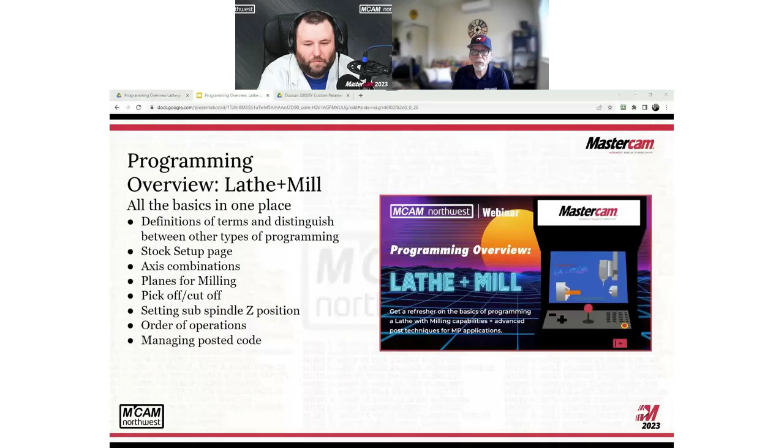So I guess we'll just move on into it here. Before we get started, it's good to have a good understanding of Mastercam lathe and the mill product. Obviously, when you put these two together, it would be a little more challenging if you just knew Mastercam lathe, hadn't worked in mill, and then you couple those licenses, and then you're not familiar with the milling tool path.

So try to get a good understanding of both sides of Mastercam first, and then also experience in the current version. For example, if you have a lathe license and you're using 2023, but you haven't touched mill since 2019, that could be a little bit of a challenge also.

So it's good to kind of get your basic learning out of the way first for the fundamentals of those two licenses, and then working in the same version.

When you first start off with this, getting a good understanding of your CNC machine first - we do see customers that sometimes get the cart before the horse. They're anxious to get programming, but they're not so familiar necessarily with the machine itself. So getting through your training on your machine and getting a good understanding of the code and everything for the machine, so you know what to expect from the output.

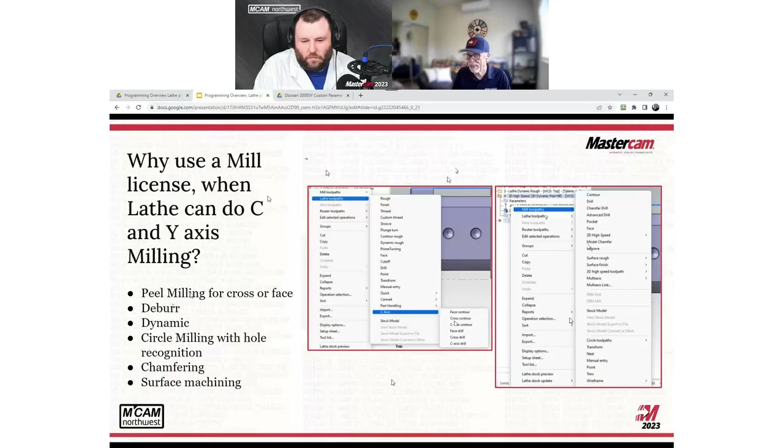Just for some clarification here, Ryan, there was some garbled transmission. He was wondering if he was misunderstanding, does the machine simulation work in the mill turn environment or only the mill side? So I had misspoken.

Machine simulation inside Mastercam, what we call MachSim, would be mill machines only, but the mill turn environment, sometimes called a dot machine, has its own full simulator for the lathe environment itself. That's a product that lives within something like Code Expert, and that's different from MP style posts. You may sometimes hear mill turn simulations called MP.net, and that's that side of the post, so it's a different post language, MP.net versus MP. We typically delineate that as mill turn lathe environment, and that is the full simulation for lathes. But that is a separate add-on, and it does require a lathe and a mill license in order to get that for your lathes at a minimum.

To elaborate on that a little bit, the thing to understand is that when you buy a machine environment or a dot machine, it is the post processor and the simulator all coupled into one package. So it's very specific to that machine, it has the skins or the machine assembly for that particular machine, make, model. In fact, in many cases it's customized right down to that particular serial number of machine. They're much more expensive, but the benefit is obviously in collision checking and the ability to fully simulate all your locators and the full turret assembly against the chuck jaws and everything, checking for collision.

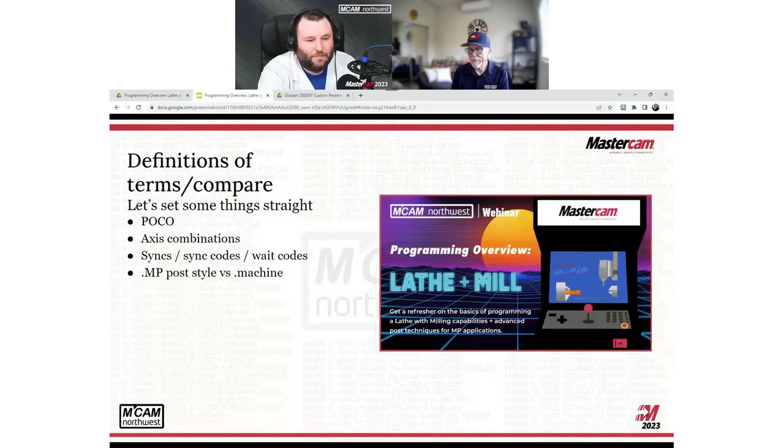So a little bit on the difference between the two styles. Heads up, this little animation will show you.

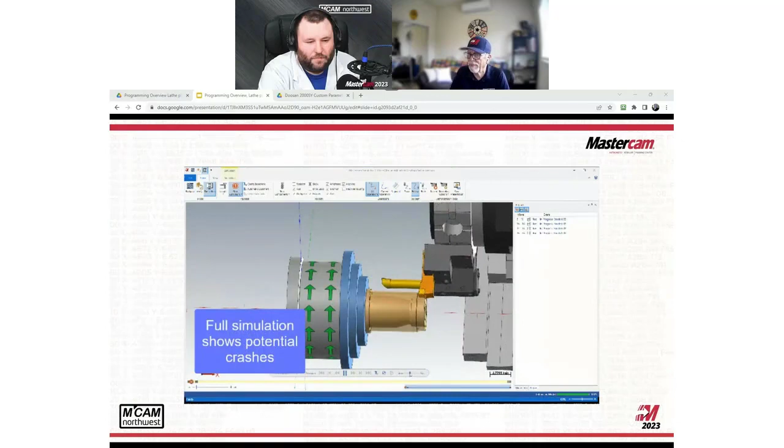If you look initially here, you'll see this is what you're going to see in your verify just using an MP post with mill and lathe. And then when you get into dot machine, this is what you're seeing for that same machine and the same program. You get the ability to understand collision potential like this, and then to quickly go in and correct that.

So you're kind of flying blind a little bit with just verify. You can elaborate more on the tool mounting or tool holder for live tooling and get a bit more accurate display on the stick out of the tool and collision check a little bit, but it's nothing like seeing the full 3D assembly of the machine in there.

So same licensing as far as Mastercam goes for the toolpath generation, but it's an additional license when you buy the dot machine environment, which comes with the post and the simulator, and that is a licensed product.

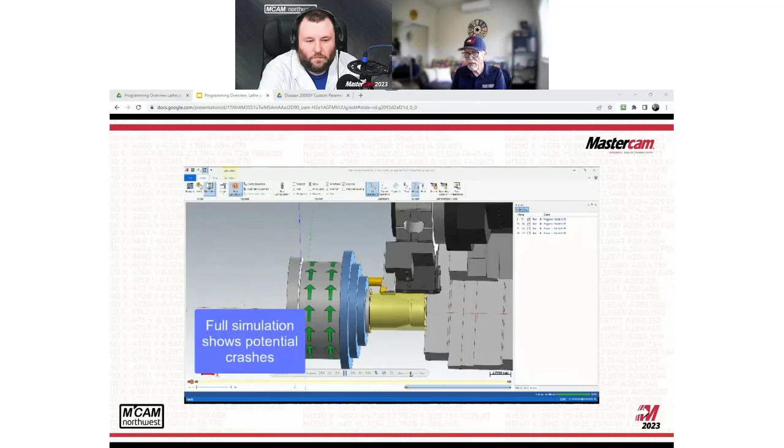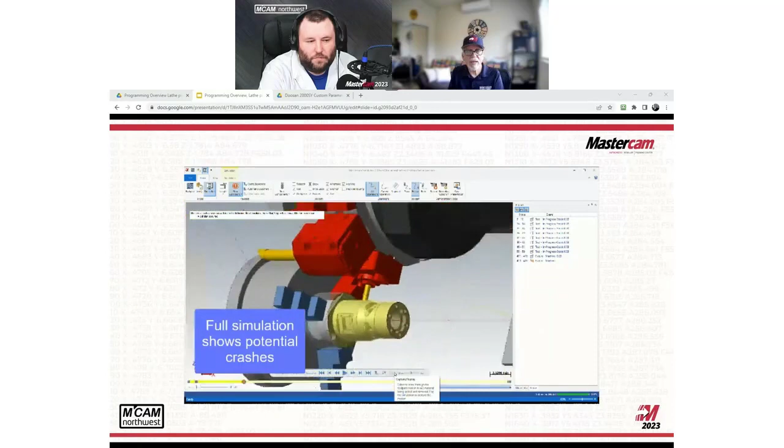So you don't need the mill turn license unless you're doing more than one code stream. If your machine has two code streams, then you need the mill turn license as well.

There is a presentation on our website that goes into more detail about lathe versus mill turn. So, Jeff, I don't know if you want to try to hunt that down.

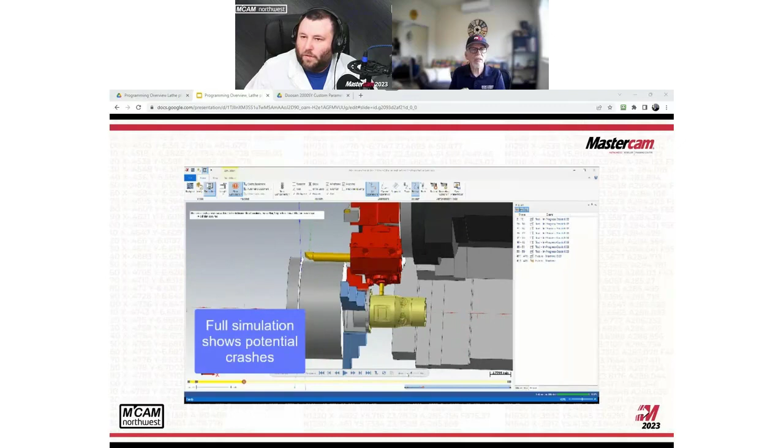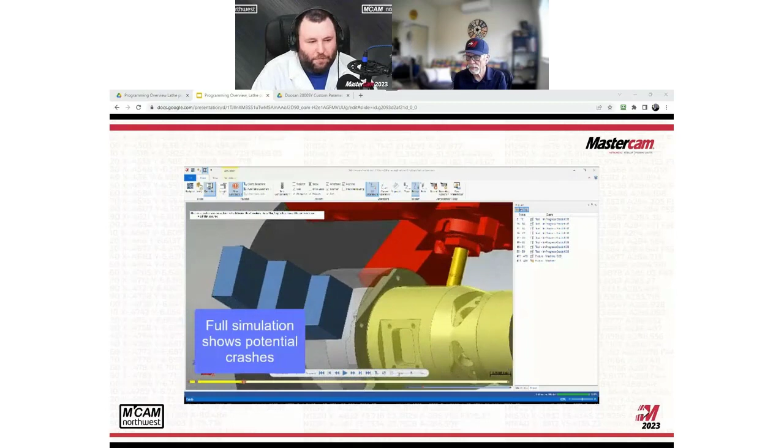John said it's in the MCAM videos. Yeah, and to make mention of that, because it's a pretty lengthy presentation, in case anybody wants that, we're not able to link the videos specifically themselves from that page, but in chat is our videos page, mcamnw.com/videos. The first presentation in there is building blocks for mill turn. You're also able to scroll down and see other presentations we may have for it, but I believe that's the one, the building blocks for mill turn that we have there. I think that's it, yes. There may be a way to link that directly, but unfortunately I haven't figured out how to link Demio or Vimeo videos. Here, I think I've got it. There's not that many videos on there. Here, so, I got it. Okay good, you just have to try sometimes.

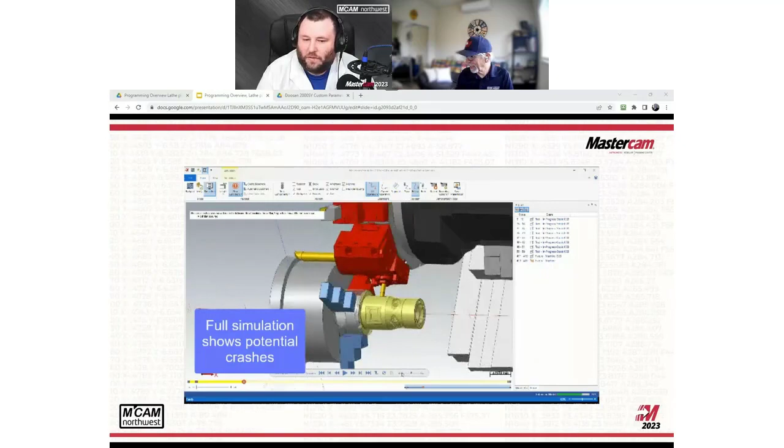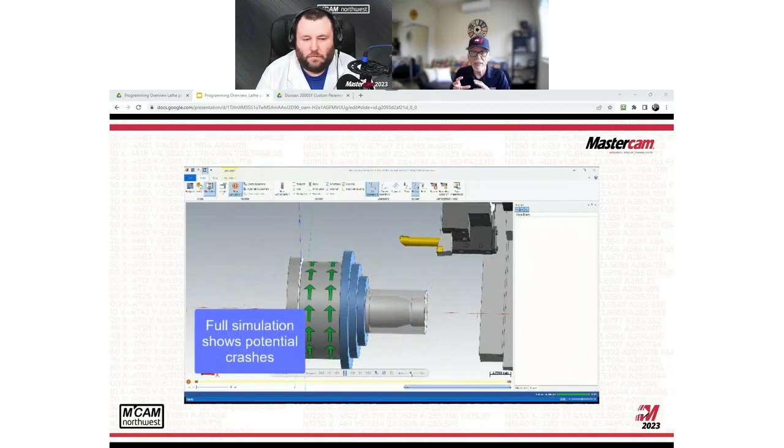So that gives you a good animation to kind of see, if you're doing really basic live tool operations, cross or face, this is going to be fine. It's just when things are tighter, you're more uncertain as to what clearances are. Maybe you have a smaller mill turn, working in very close to the chuck, or maybe even a collet system, and you're working very close to the spindle, then it gets pretty iffy, right?

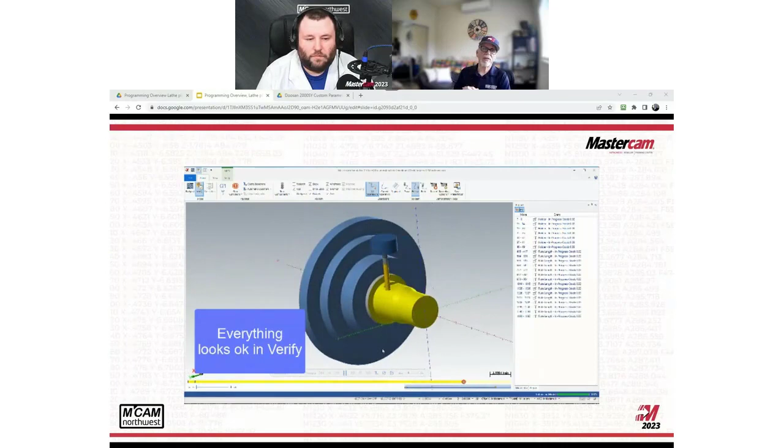Because you have your adjacent tools and those locators, that could also interfere with the chuck jaws. So if that's the scenario and you're doing that on a regular basis, then maybe there's a return on investment for jumping into a dot machine for that particular style of machine.

An anecdote for me: I used to program on just normal MP posts where all you had was verify, and I would find all the times I'd run out to my machine and realize I had a tool in a station that was too close, and all of a sudden needed to move it to the back side of the turret or something like that. It facilitated running back into the programming room and changing that up.

So making adjustments and having that simulation and being able to run it at the computer itself really highlights those collision issues before you're out there loading tools into the machine. Great visual check for that. Of course, full collision checking, which is the big important one.

Dot machines are my personal favorite. You can still program in the normal MP posts, you just have to be a little bit more cognizant of where your tools are at on the turret.

Right, so it really took the development of the dot machine environment to be able to feed it enough information through the post processor and then off into simulation. That's why that's all packaged together to get that accurate display. So yeah, it's a whole different world once you get into that environment.

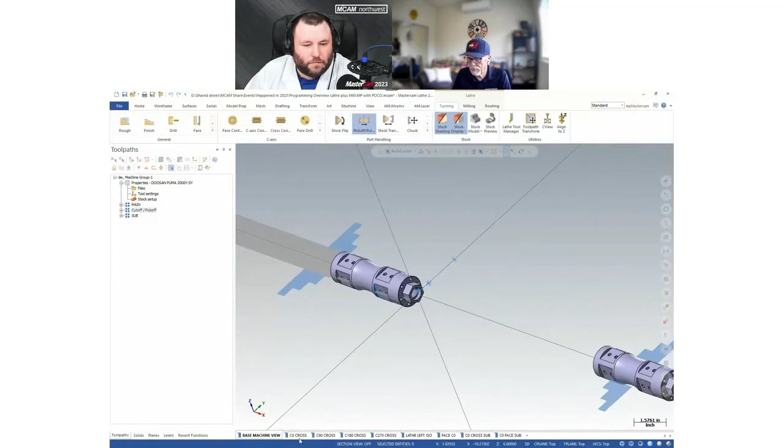Okay, so moving on, we're going to talk about the stock setup page, so I'm going to jump into that. I've got an example that's programmed up here, and I have some view sheets that are set here, we're going to talk about that.

And so the structure for this is all done with an MP post, and I have my POCO ops and subspindle ops, and then my main spindle operations. And then in the setup for this, in stock setup, I have my left spindle stock defined just as you would for lathe. I have my left chuck jaws defined just as you would for standard lathe programming.

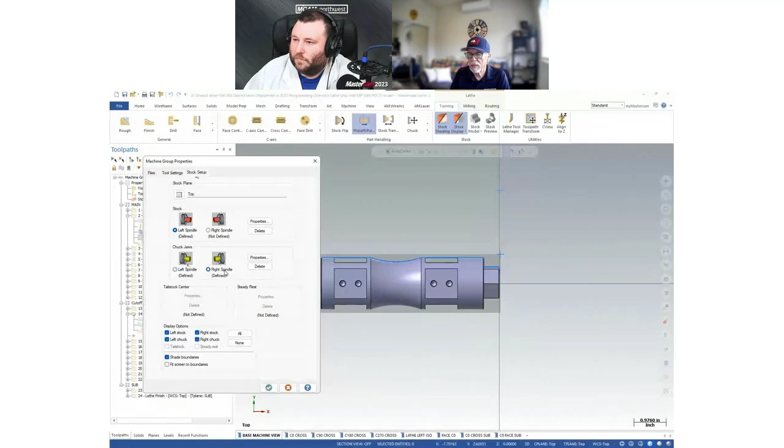But then you'll also notice I have a right spindle defined here, and when I go to properties for this, I have a distance set in here, which is the distance for where that chuck location is at. Now I'm just using an arbitrary value of 15 inches. Of course, that would be a very, very small lathe, but this is just really visual.

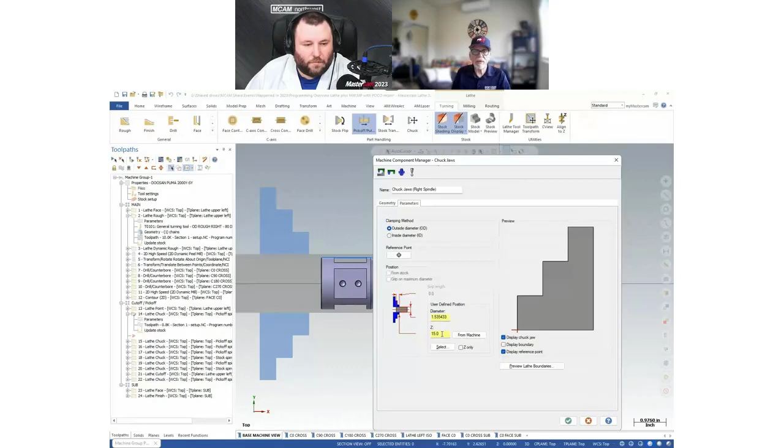So on screen in Mastercam, when you're not running a machine environment, it's just sort of a symbolic distance between the main and the sub spindle. You want that number to be pretty realistic for whatever machine you're programming, and so you do need to set that distance there.

Once you set that distance, then when you go to do your POCO, you're going to see things transfer from your main spindle to the sub spindle. And right now I have kind of everything turned on for the visual, and so that's kind of the first step.

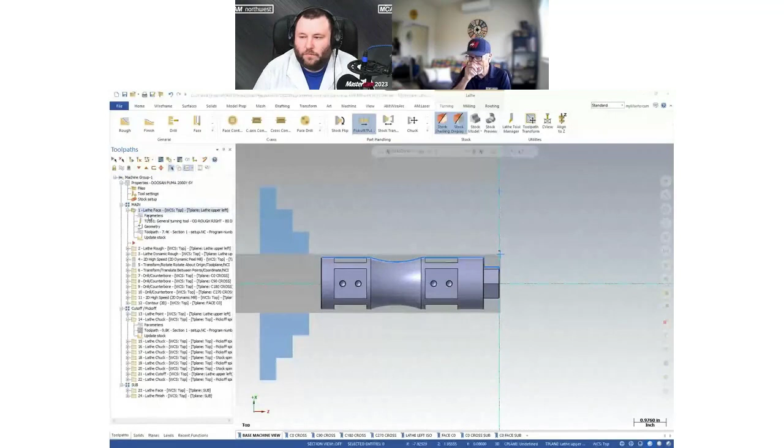And then when you get into your turning operations, when I go into any main spindle operation and I go to parameters, what's really a good habit here is, when you start working with two spindles, make sure the first thing you look at is this lower left corner, and that you have the right axis combination selected. It's very easy because it'll default to this.

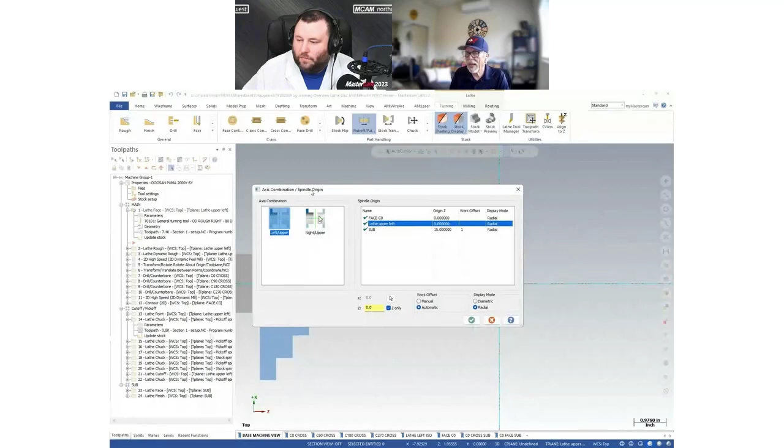When you go into your axis combinations, when you're starting with a new file, you're going to have left upper, and then your post processor will put the right upper axis combination here, but nothing will really be set for this in a new file. So what's required is that you select right upper and then you create a new tool plane. When you create a new tool plane here, you'll see that it says lathe upper right. Then what you want to do when you create that is set your work offset to 1, and what that's going to do is set up a G55.

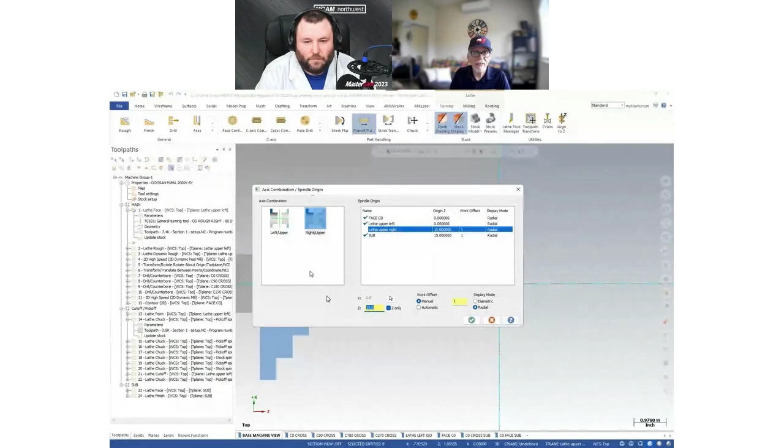And then you're going to put your symbolic distance to where G55 is at here. So I've got a work offset of 1, which will trigger a G55 whenever I call up and use lathe upper right. In my example, I did this earlier and I just renamed that to sub. So I know that when I look at the axis combinations, I just look for sub, and that's automatically going to give me the spacing and the work offset.

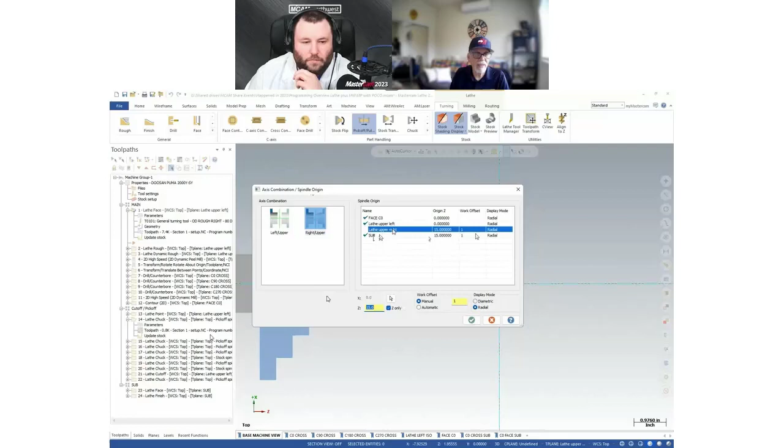This is something you have to do when you start a new session in Mastercam. So I'm going to cancel out of this. You'll see all of my main spindle ops are all set to left upper, which is just the default. You don't have to set that, it's already set for you.

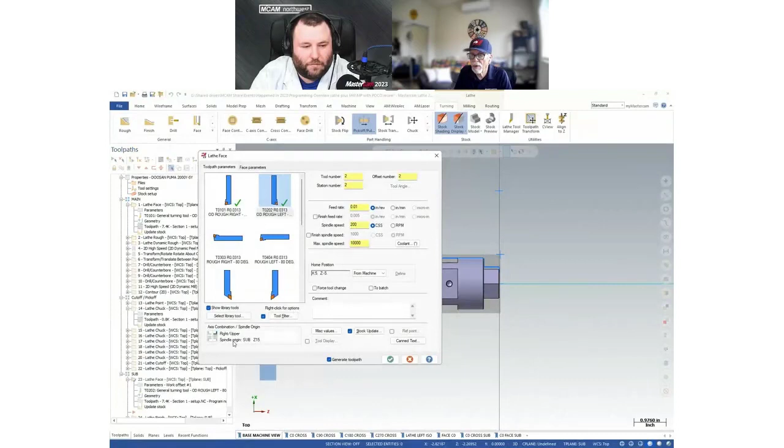You'll see that after my POCO ops down here in these sub ops, if you were to open one of these up, you're going to see that I have my axis combo set to right upper. And that has this spindle origin all set with the work offset of 1, which is G55. And that's how we're getting the two.

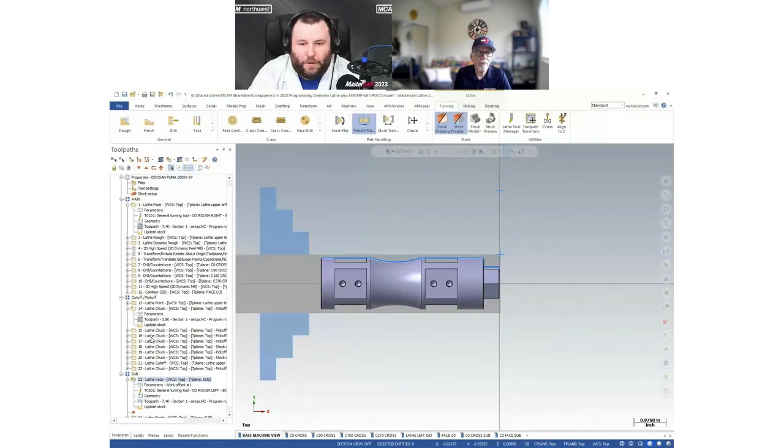Just to talk about that, sometimes I find with individuals, they'll go to work on the sub spindle, and when they start their work, because their tools default to that upper left axis combination, they're not able to get their lathe tool paths to look correct on the sub. So that's where it's always good to check that axis combination first when you're building your new lathe operations on the sub, just to make sure that you're picking the correct axis combination. Mastercam doesn't know what side you're going to be working on, so that's something you need to keep in mind for subs.

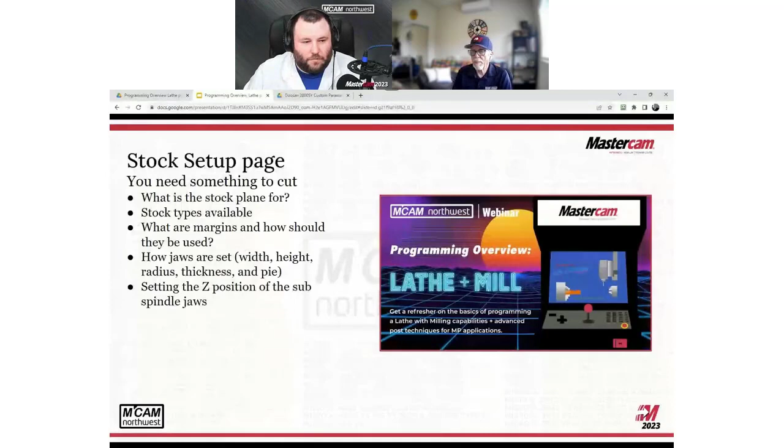All right, so that's a little bit on axis combos. I did have a note here to talk about margins in stock, but I'm thinking most are familiar with that, but let's just touch on it real quick just to make sure that when you're in your stock setup and properties...

In my example here, I am using just the standard kind of stock definition, make from 2 points, keyed in the exact OD of the stock that I want to order. And then the length is the actual length of the part. And the position along Z-axis is just set to Z0.

And then I'm using a right margin to give me my 30 thousandths of cleanup for my face operation. You can simply shift the Z position of the stock 30 thousandths and not use that right margin. I've seen that done both ways.

So Jeff, what are your thoughts on that? Do you typically use the margin, or do you? No, I'm naughty, I've always had the margins off, and I've repositioned my Z the 30 thousandths, but both are effectively the same. The difference would be, I believe, the margin bakes in for the length of part that you put in. You could leave that the same, and then when you add the margin in, it maths that out for you. Versus if you push your Z face out, you then physically need to account that in for your part length as well.

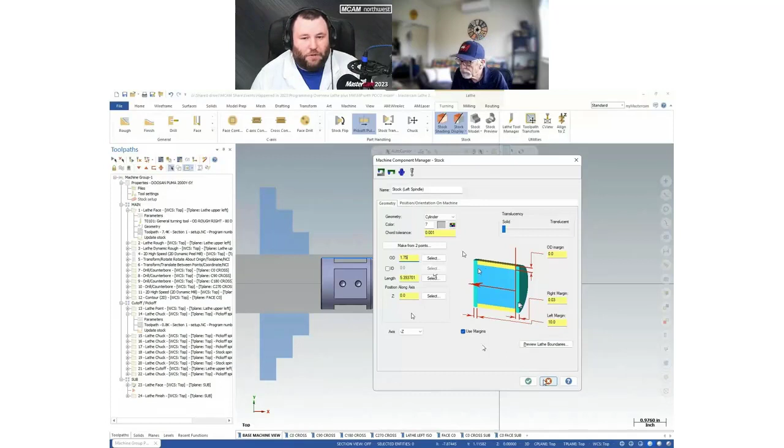Along those lines, if you didn't have the bar being long enough, you will get an error like 'left chuck, no stock to clamp.' That's what's going on - it's missing it because the system is looking at the boundary of the stock representation when it grabs. If that doesn't exist, if it's been pulled out too far, you'll get an error.

So I had a note to talk a bit about jaws, but I think we have really good videos on the jaw setup itself. Let's just see if anybody has a question, or if you want to spend some time talking about jaw setup. We can let people pipe in there in the chat. Otherwise, we'll skip past that. No questions so far - okay, I was kind of guessing that might be the case.

Okay, so we went through axis combinations fairly thoroughly there. Maybe show where in mill operations we would access the axis combinations, because it's in a different location.

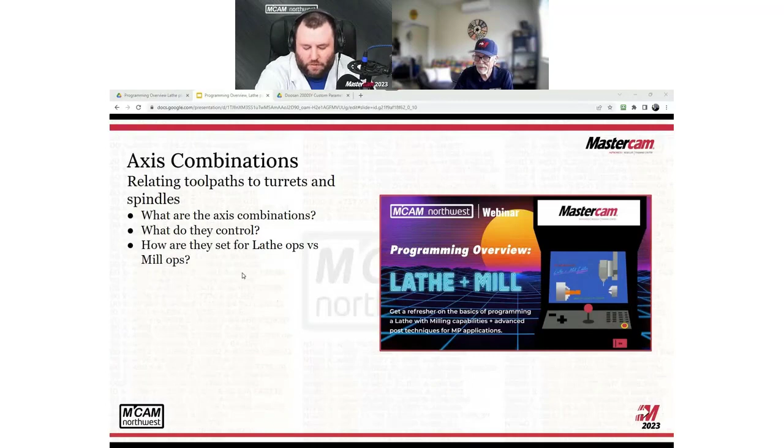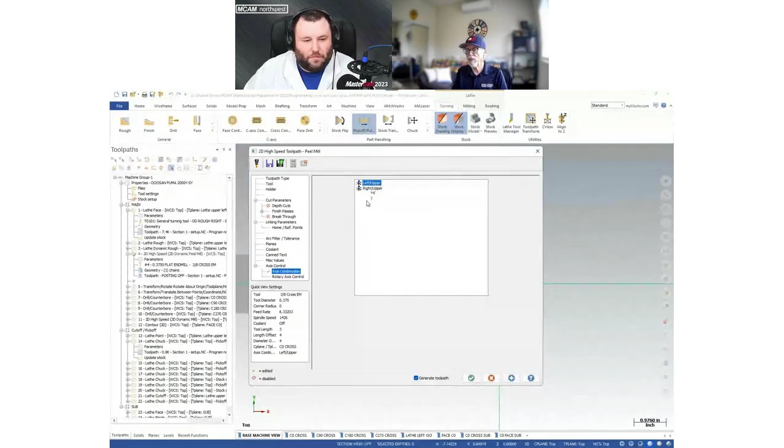Yeah, I think this is a good time to talk about that. So when you're into a milling operation, let's start with my first mill operation here. It's going to default to left upper, but you'll see that in milling ops, it's down here under axis control - axis combination, left upper or right upper. So this is just simply a selector here. You need to make sure that when you start doing milling operations for subspindle, you have right upper selected. It's just a quick toggle between left or right here under axis control.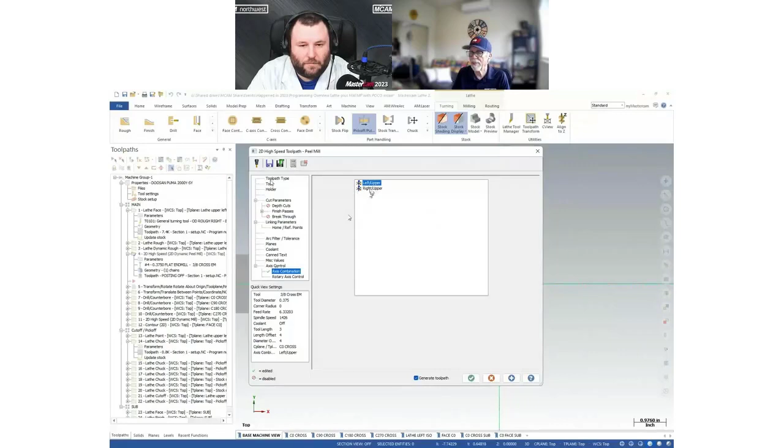Again, you could get some fairly erratic results if you didn't have that selected. For those sub-spindle cross or face milling operations, you need to make that selection here. So again, just to reiterate, it looks quite a bit different than when you're in a lathe operation. It's a little more in your face in the parameters of lathe operation, being that it's right down here in the lower left.

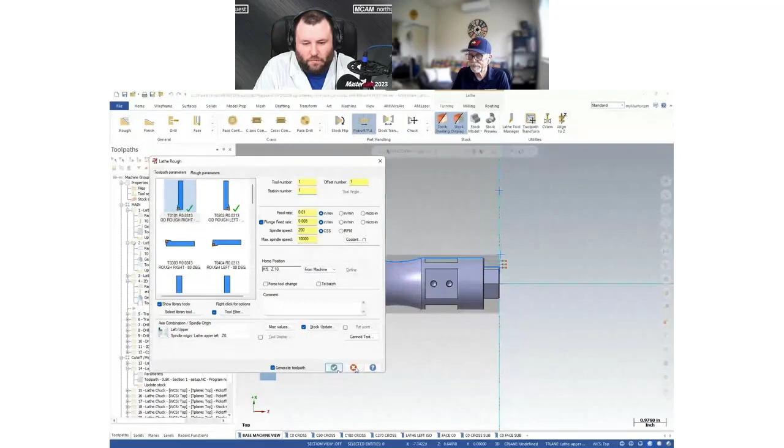Yeah, so an indication for people when they post out their code - let's say you had it on the wrong axis combination, you would see those ops that you were expecting as a sub op would output as G54 as opposed to G55. And then you would have some silly Z height, 15 inches instead of where you'd expect it on the part. So that combination is incorrect.

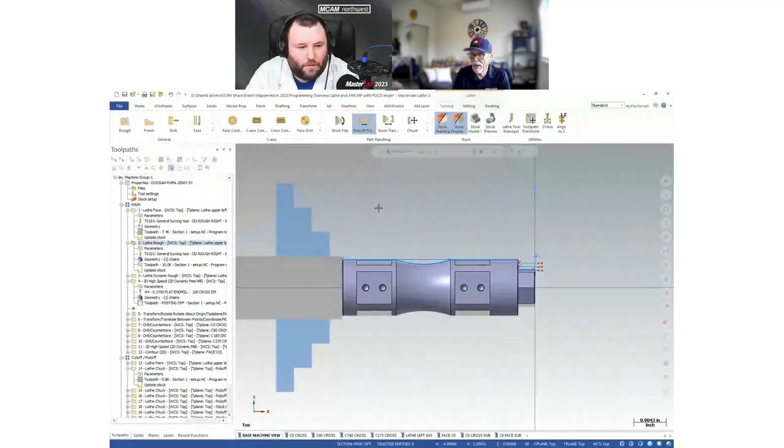So this leads into a quick concept and discussion on building out a template. There's a fair amount of setup that goes into getting everything set in a file like this. This particular example - we use this part all the time for testing and for training.

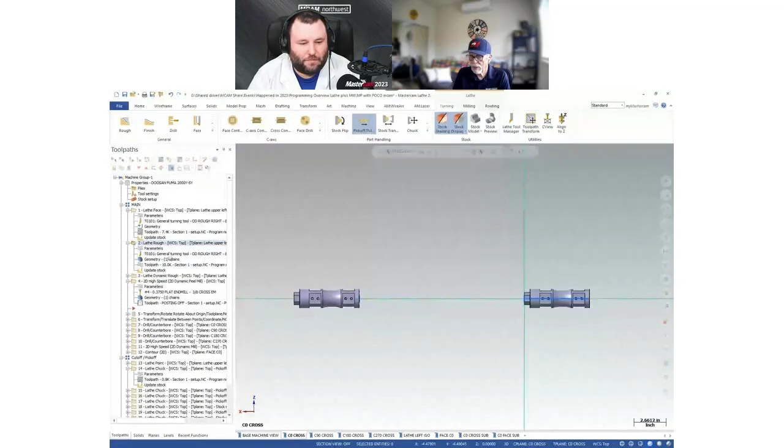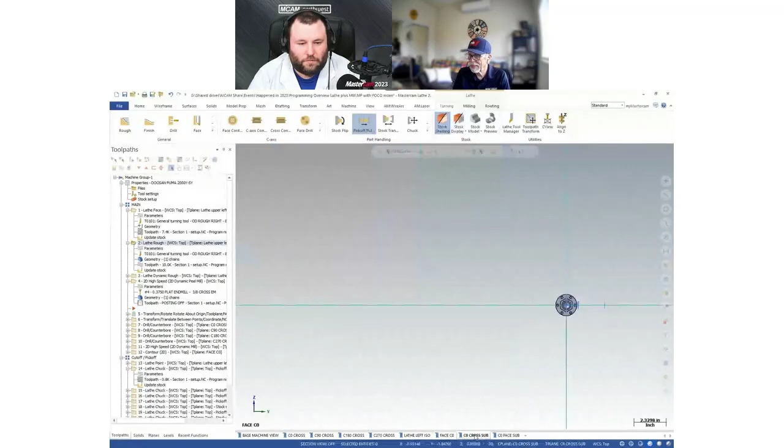With everything set, I've got view sheets that are set to show what the base machine view is. Your C0 cross plane is set, C90, C180, C270, with a couple extra views mostly for graphics - Face C0, C0 cross sub, C0 face sub. Taking the time to build out these view sheets - this isn't training on view sheets, but what that's doing is toggling all of these plane settings, and I have all these planes built in.

If I were to take this file now that it's fully programmed and just remove the part from both the left and right spindle from the file, the pickoff ops can be stripped out, because those kind of need to be recreated when you start to build out a new file. And then you save that template.

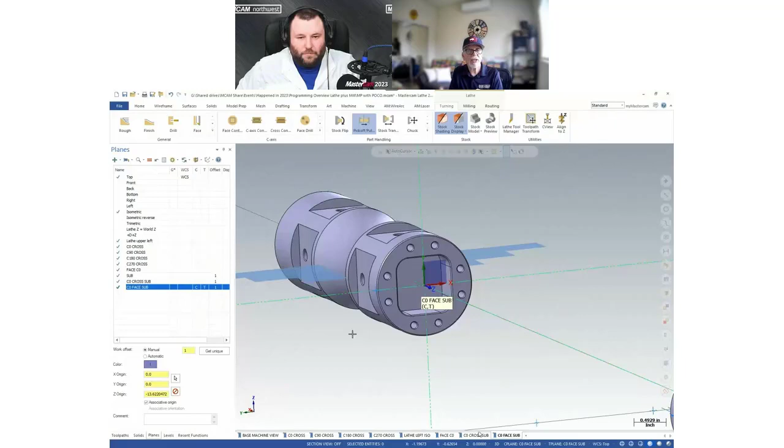Well, I already have my distance between spindles set. I have all of these milling planes defined, ready to go. And then all you need to do is merge in the next lathe part, adjust your stock, adjust your chuck jaws, maybe even leave these turning and milling ops in here because you might be using those. They'll all have red X's because they're not connected to anything. But you can see the benefit there, right, Jeff? There's a lot of settings that we just put in place that we could reuse for the next lathe project.

Yeah, anytime you start a new project, you're kind of going through the same motions of establishing your planes, because that's a manual process for MP when you're going to be using your milling operations. We'll touch on how to set up those planes, but it is a manual task. So if you can create a template where those planes have already been set, hey, that's 15 minutes worth of work you've just saved.

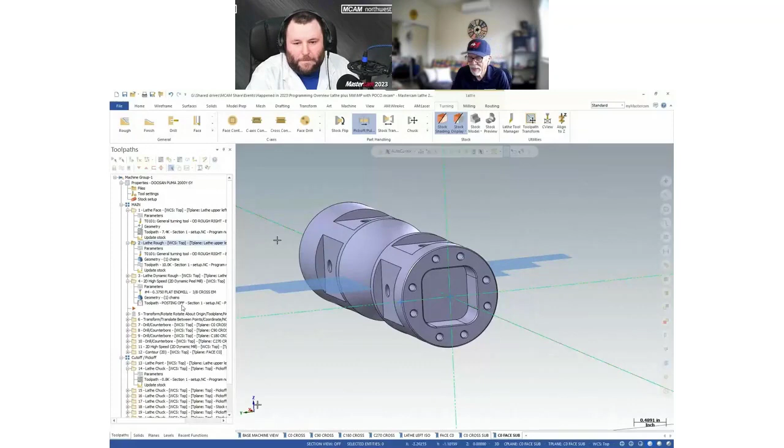That's great. So I'm going to talk about building the milling planes now.

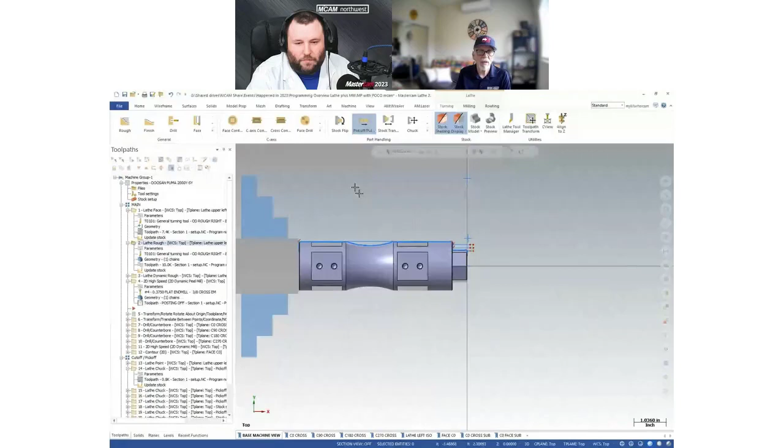We're looking down from Mastercam's world top view, and visualize this as sitting on a lathe with two spindles, left and right, main and sub. This top plane right here that's in plane with Mastercam's top view is not your C0 cross plane. I'm going to demonstrate by using a motion controller to roll this around so we can track and follow. Look at my view gnomon here in world - you're going to see the Z-axis is up. Don't think lathe coordinates when you're looking at this, because this is world coordinates.

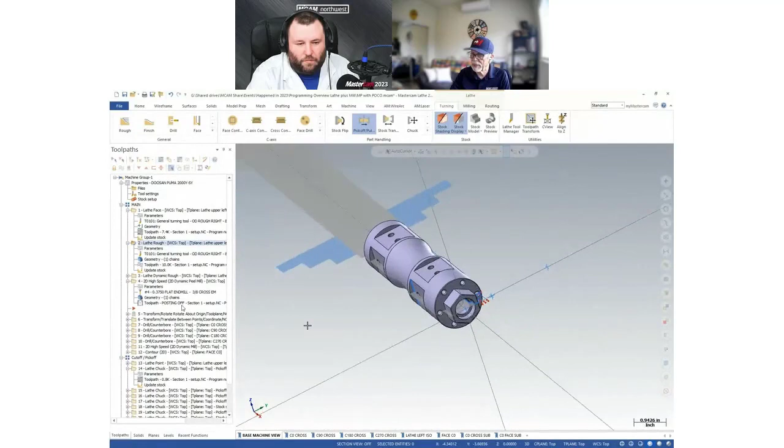If we were to come around and look at the face of the part here and go around to this side, this plane right here to mill this plane is your C0 cross plane. And all of the Mastercam posts, be it MP or dot machine, this is always C0.

The way to look at that is when you look at your face C0 plane like this, think about polar coordinates. Your 3 o'clock position is always C0. So from face milling, this position right here would be C0, this would be C90, this is C180, and this is C270.

Now some machines in post-processing, this is C0, C270, C180, C90. That makes it fun. Well, the post-processor takes care of that for us, right? So if their view system and the way they define the C-axis rotation is going the other way, we can just take care of that in the post, so you don't have to think about those numbers.

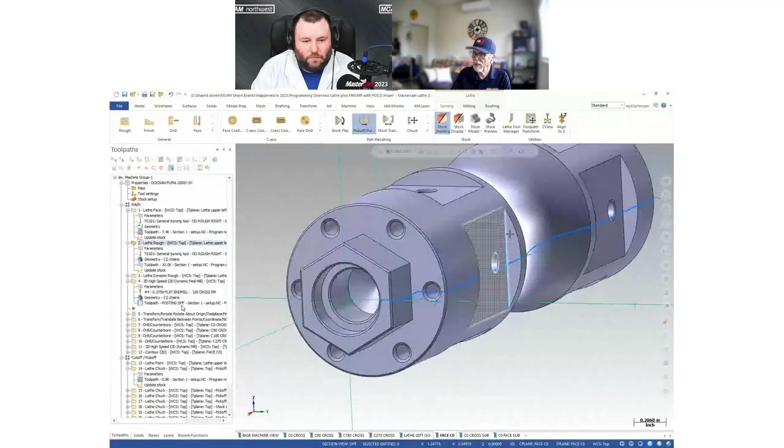But from Mastercam's standpoint and programming, this is your C0 cross view. So we could figure out what plane that is in Mastercam, looking in the planes menu, and figure out that's probably Mastercam's back view, and go to the G view and click, and look at the part that way to see if that's correct.

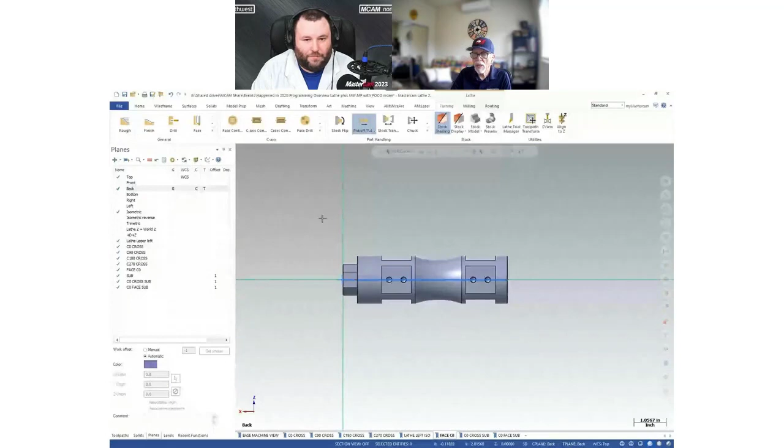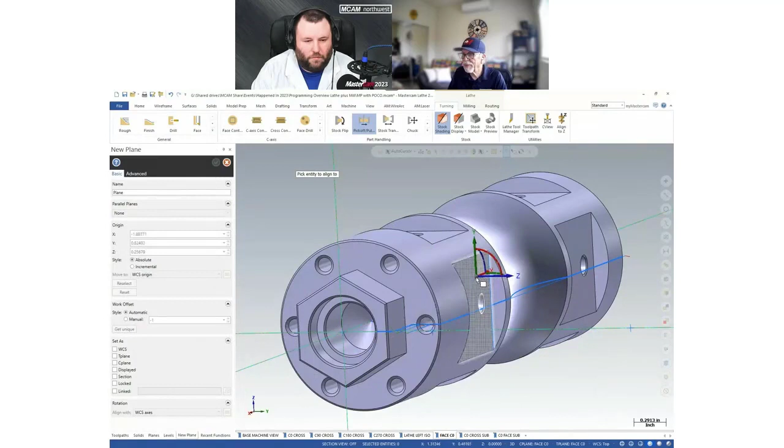But another way to handle that is, let's go back to my face view, and I'm going to just rotate this around. We could just create a dynamic plane by clicking on this, dragging it up here - let me see if this is working - okay, dragging it up here and snap it onto this plane, and just drop it onto that flat face.

And then you need to make sure that X positive points towards the main spindle. That's very critical. That plane is now in alignment with this face. And then the final step is to move to WCS origin. When you hit equals, that's going to move the origin of that plane to the finished face of the part, and then give that a name.

So we'll call this C0 cross, like that. And so then setting your work offset, this should be set to 0 for my main spindle C0 cross.

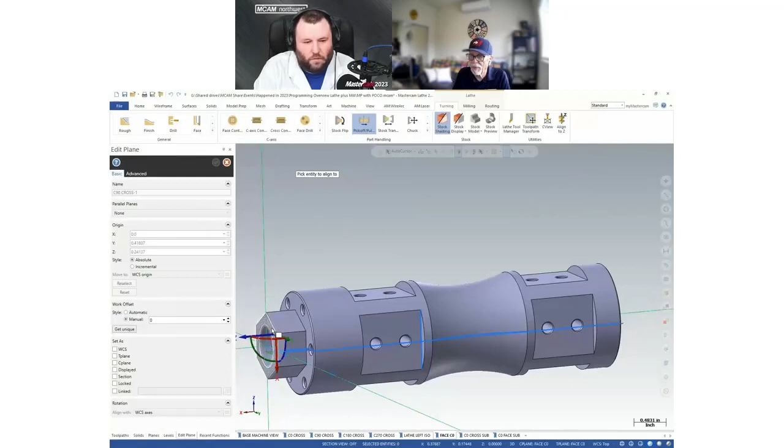When you start creating these planes, you can start copying planes and modifying them. So for example, I'm going to call this C0 cross 1, and then it might even be faster to take that particular plane and duplicate it. Let's say I'm creating - let's rename this to C90 cross. Right now it's a duplicate of that other plane, but I can right click and edit, and then just rotate that 90 degrees. So your Z would be pointed up. Whoops, let me catch this again here - I got to get in a little closer. So make sure you get a hold of this and just rotate this 90 degrees.

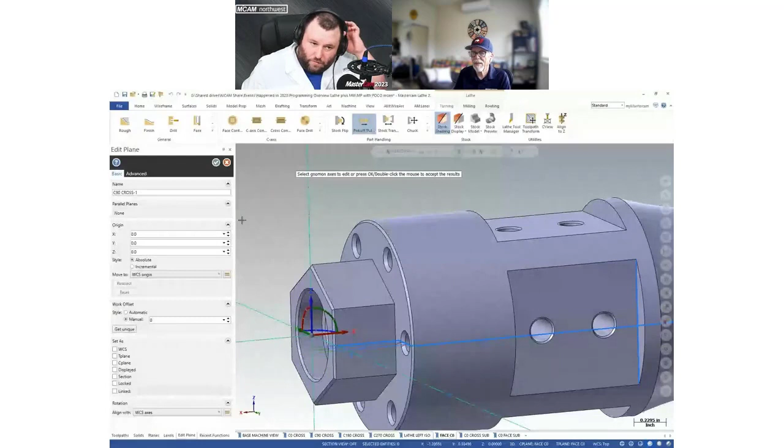I've got some lag here on my display. All right, and so then you would change this to C90 cross. So that's already got the proper work offset. You can use that technique of copy or duplicate views and then edit the rotation to get all your different planes.

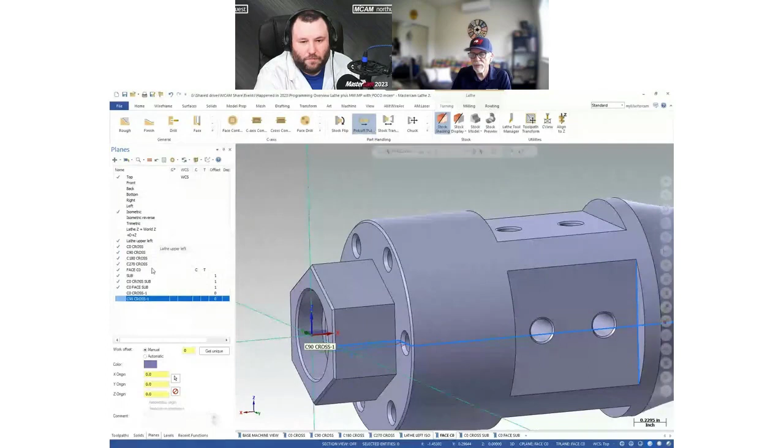If you're working from a template, maybe in your template file you already have all of your basic C rotations - maybe you have C0, 45, 90, kind of all the way around the part, and that's already in your template. So you don't have to do anything, you don't have to create these, they're all preset for you. You've got your subspindle view, you've got your face view, and as you start to build these up and accumulate them, you can do it that way.

There is a utility in Mastercam Lathe, but I'm going to show you this. It's been here for many, many years, and it's just called C View.

So this is an old utility you can click, and you can simply set this to cross and perpendicular, then select a line element, and it will give you the rotation. This is C0, and it knows and understands the kinematics of the machine, and that particular plane would be a C-axis rotation. When you hit the check mark, it's going to create a new plane for you.

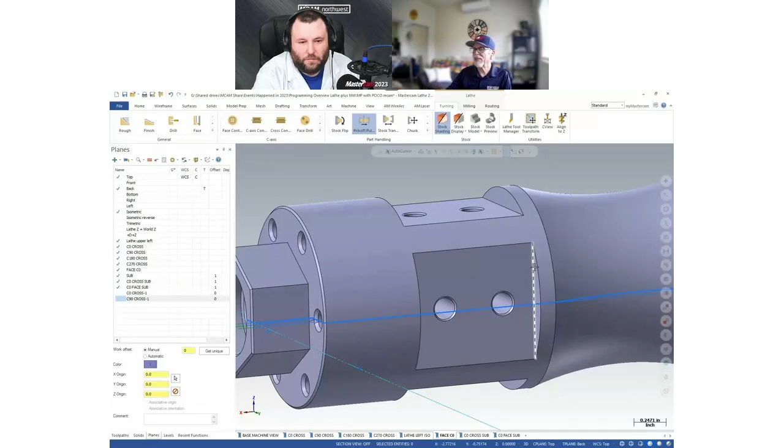But working off of a solid model, it has to have a line there. So by the time you create the line, go into the C View utility, I think it's more clicks than just clicking on a face, moving it to the origin, and giving it a name. It's maybe a toss-up in terms of workflow.

What Tim means by line element is wireframe geometry, because that's an older utility. That's why Tim clicked on the wireframe rather than the solid. But it is another option.

So if I go to wireframe and create a curve on one edge, pick this flat up here, and put the line there, then go back into turning, go back to C view, click, make sure this is set to cross perpendicular, and select the line here. See, you're going to get the C90 there, right?

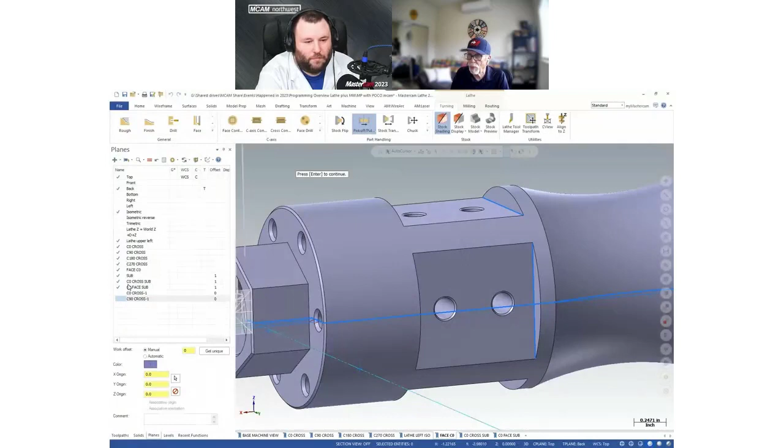It has this funny little display feature too, which puts a tool in at the origin in that orientation, just so you can see that looks like the right plane. It's perpendicular to that line and already set to the origin for you. Then when you press enter to continue and hit OK, it builds that additional plane and sticks it into the list for you.

So you can do it by C view. I think that's maybe a much older way of doing it compared to just using dynamic planes and clicking on a face. But it is the precursor to the tool plane functionality that's built into the mill turn.

So if you go to dot machine, you get an entirely different tool plane functionality where it will automatically build tool planes based on the tool path. It has the ability to derive the tool plane from the tool path itself, and you don't have to create anything. It automatically sets the origin, sets the tool plane, and sets everything up for you.

There's also a feature in the dot machine environment that lets you manually create tool planes, like this, but it's much simpler. You just click on a solid face and it creates it. So a little bit on that subject.

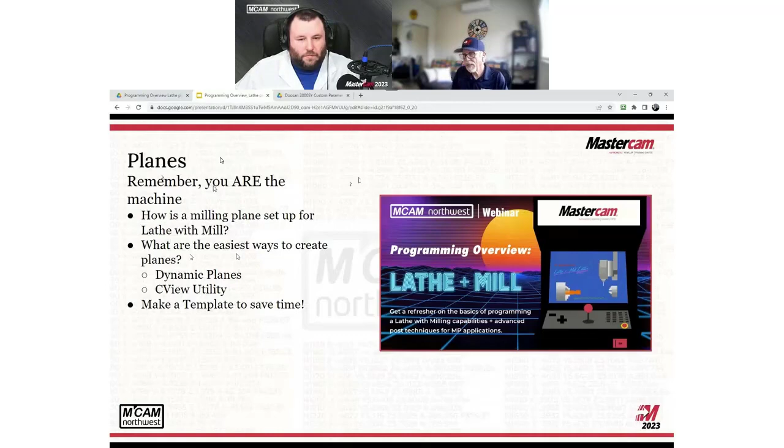And when you get to your cross milling planes for the subspindle, those are not flipped. They're just translated down to where the subspindle is at. So I think that covers that, and let's talk about POCO now.

In building a POCO operation, first of all, you have to have a post processor built specifically for your machine. You're not going to get good POCO out of any kind of a generic post. If you know how to get around in the MP post language, you could take a generic post and add good POCO to it, but that's a fair challenge.

So buying a custom MP-type post that fully supports POCO, you're a fair chunk of your way into buying a dot machine environment, so take that into consideration. Because if you end up buying a dot machine, you may have wasted your investment in the MP-type post, since you wouldn't be using it—you'd be using dot machine instead. So take that into consideration.

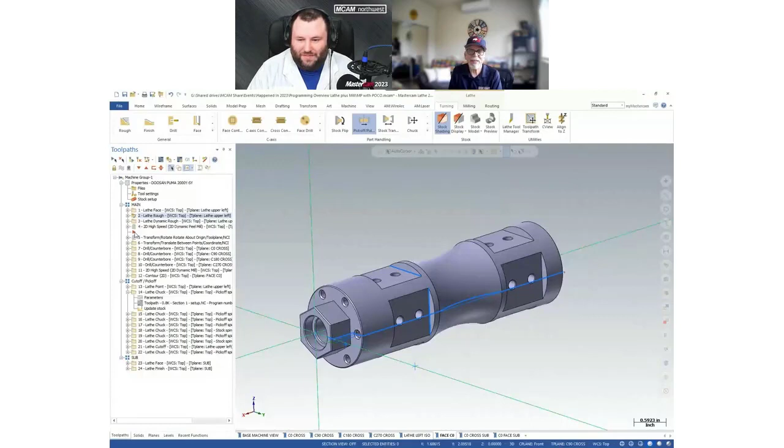Won't get into pricing because there's a variety of possibilities there. But when you're dealing with POCO, the typical setup is you build out your main spindle operations and you get ready to develop the POCO.

You build your POCO, and it's automatically going to go up here to part handling and clicking on your pick off cutoff after your main spindle operations are done. You tell it you're going to do pick off, bar pull, cutoff if that's the case. If it's just pick off and cut off, or if you're using slugs for just a pick off, you've got your different styles of operations here.

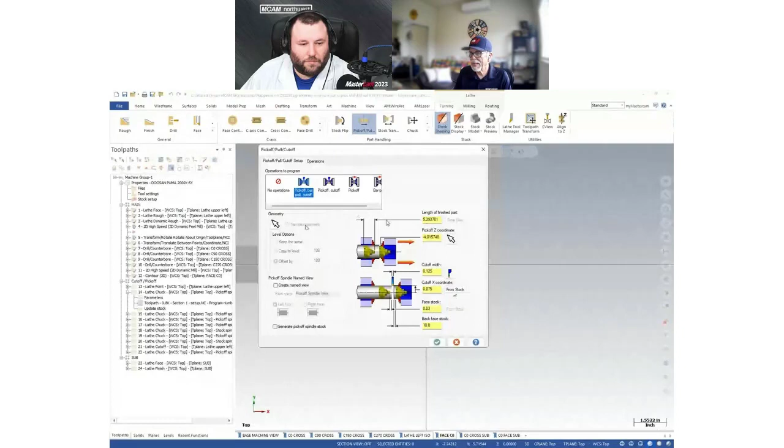And then making that selection, selecting the geometry, telling it to translate. We won't get into all the training for POCO, but these settings all need to be set: your length of finished part, and the pick off Z coordinate, which is where the subspindle chuck jaw face aligns to the part in the main spindle. Your cutoff size, the X coordinate can come from the stock, and then how much face stock you want to end up with afterwards.

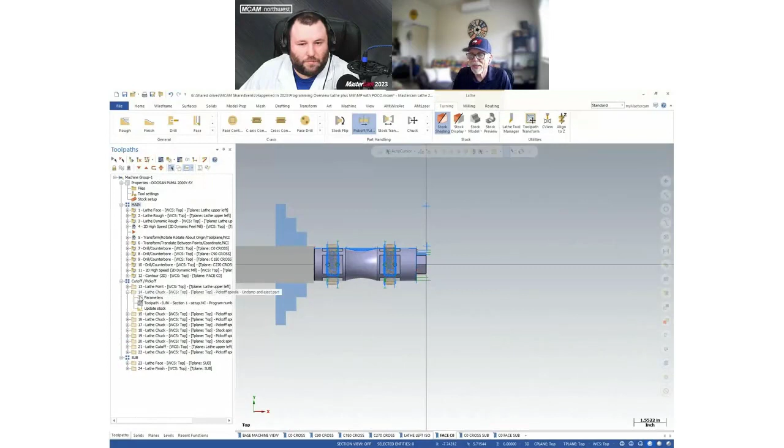So after you process this, what you end up with is this folder of operations. For this particular post processor, this triggers about 11 different operations, and these are auto-generated and dropped into this folder for you. So you're three-quarters of the way there. You've got the POCO ops in place, but in these operations, there are settings that you need to set.

If I open up a chuck operation, taking the first chuck op here, you'll see that in custom parameters there are these settings. You're not going to get good POCO unless you know these settings and know what to set them to. These are very machine specific type settings.

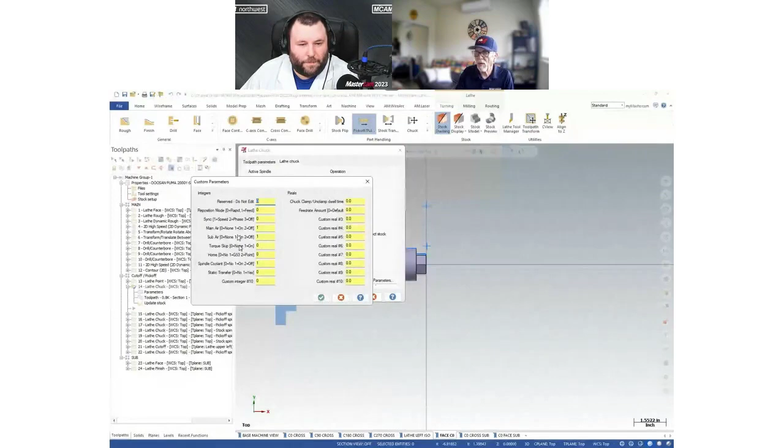So ideally, your post processor for MP with POCO comes with an instruction sheet like this. This tells you, at these pick off, pull, cut off operations, what these settings are and what they do and how to set them.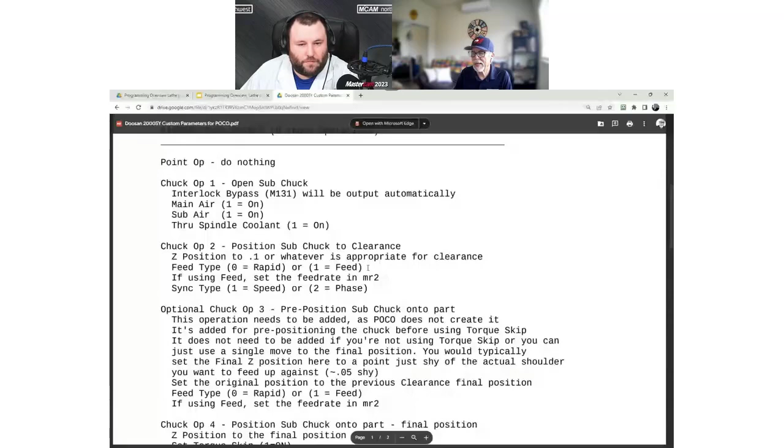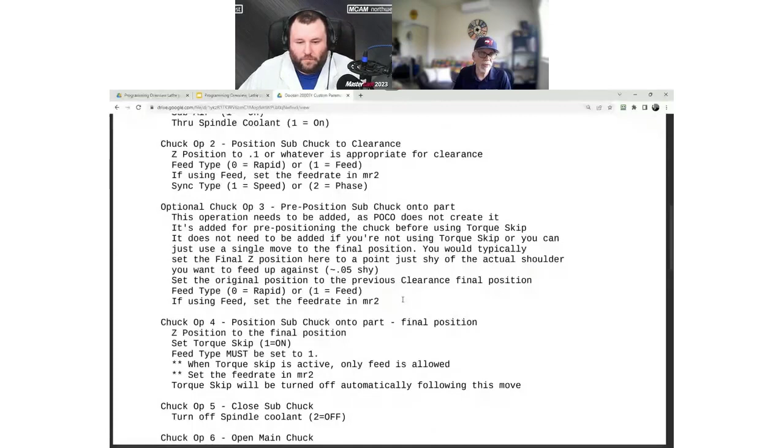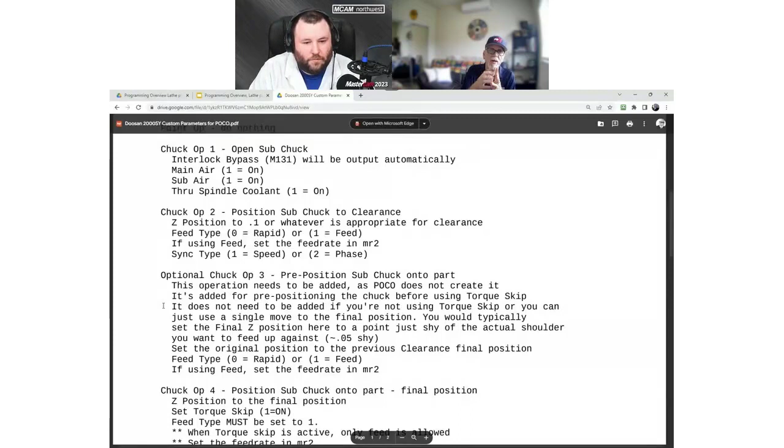We don't need to get into all the details for this particular machine, but it'd be very difficult to get good results from a POCO operation or set of operations without setting these. These include things like your pre-position, do you want a rapid to clearance, and then do you want to feed onto the part. Do you want to use a torque skip if you're going up against a flange, and how far before the flange do you want to activate that and slow down as you begin to touch that face?

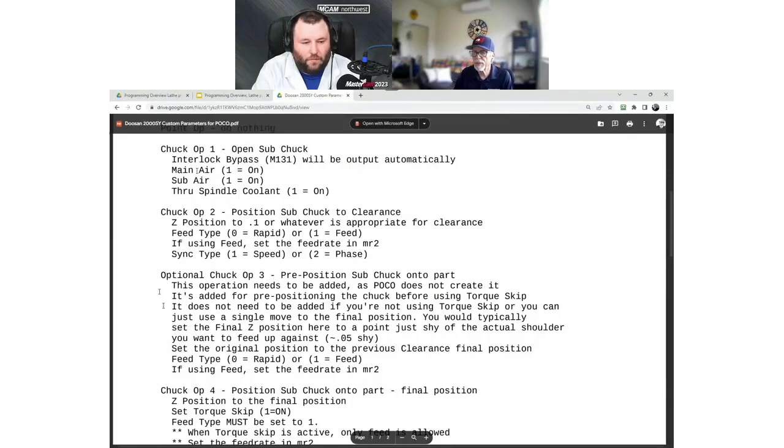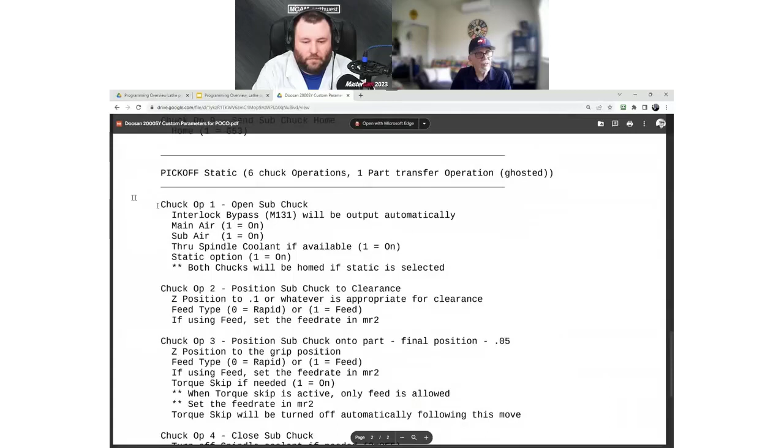Your air control spindle, if you're flushing - all of those types of settings are in this document. Now, if you don't have this document, you want to get back with the developer for that post and ask for those. Sometimes they're in the header of the post processor itself. I've seen these instructions just embedded in the PST file itself, but typically it should be a PDF that goes along with the post.

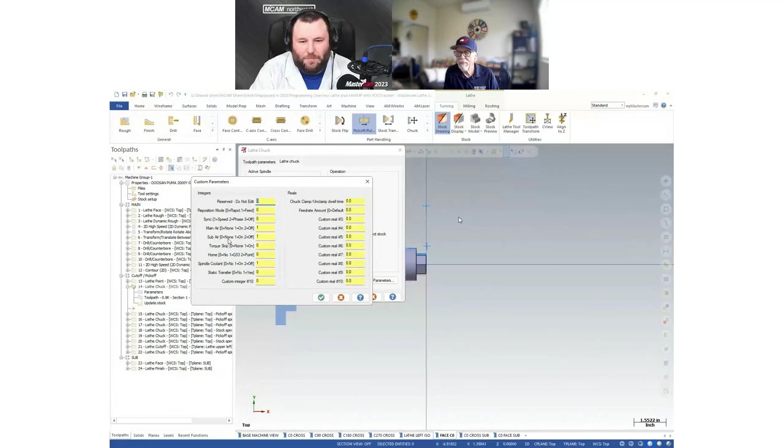This is just because machines are different from machine to machine, and inside Mastercam, those part handling operations are essentially an overview of how it will work on all machines. But then these custom parameters need to be specifically tuned to that machine's G and M codes or what options are available. So it's machine specific, and that's why the post developer will have a document specific to that post.

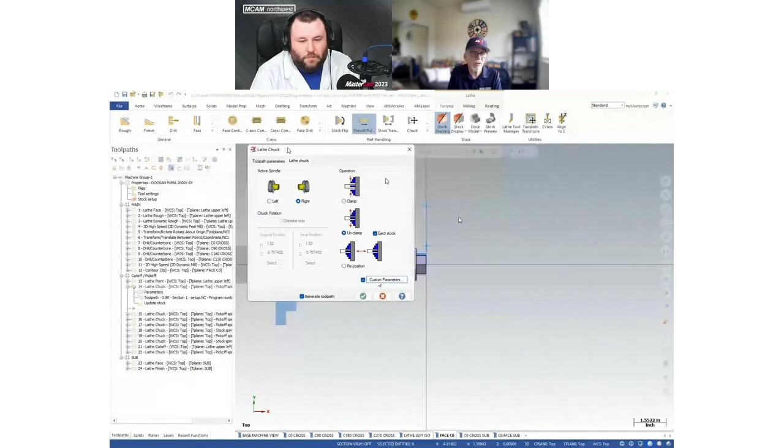And with a little bit of custom work, you can get these to default. That's post work to get these to default to your common settings, but there's still going to be variables. So just remember that once you build POCO, you're not done - you need to go in and where it's needed, adjust. This move to clearance is going to default to, I think, 0.5, but maybe you want to make that like 0.1. You want it to rapid up a little closer.

And then the next operation is feeding onto the part. When you feed onto the part, you want to maybe have a high feed rate so it's not taking too long to get there. So that's dropping the POCO operations into place, making adjustments there, and then knowing what those adjustments or settings should be.

So if you're struggling with POCO, those are some things we can also help with. We have some training materials available for that. Again, make sure that you have the proper settings for your MP type post. If you get into a dot machine environment, you don't have to worry about that - that stuff is put in there for you. You can adjust it, but it's all placed in there for you because Mastercam already knows the details about that machine coming from that machine environment.

Okay, so I think that's about the tail end of this presentation here. Let's take a look.

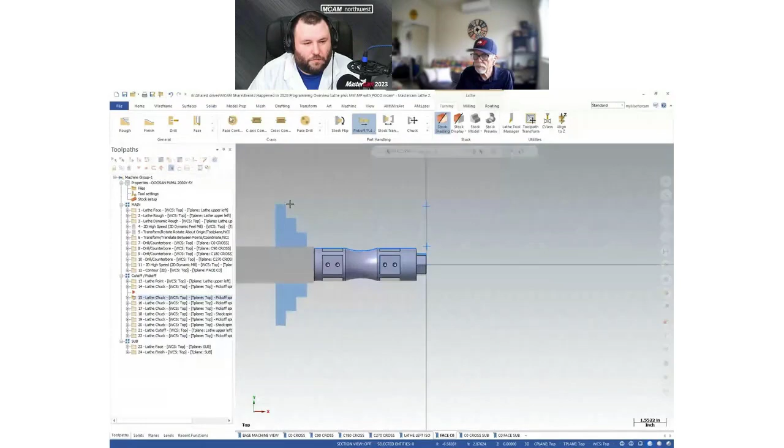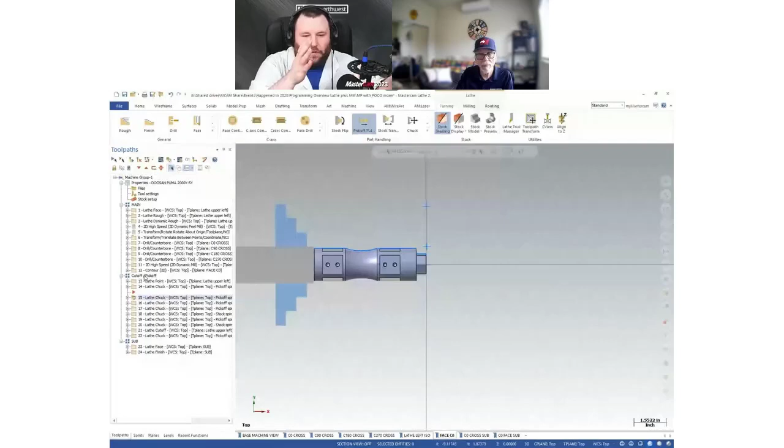I think the other thing we wanted to talk about was single stream versus multi-stream and how you layer the POCO group into Mastercam. Typically during single stream machines, like we're demoing right now, the way Mastercam is layered, we have a toolpath group for the main spindle, then your POCO operation, then your sub spindle. If we had a multi-stream machine, say with 2 turrets, where we could do work on the main and sub at the same time, you would want to rearrange your POCO operation to come at the end of the program. So when you post out your code, you're doing work on both spindles at the same time, and then you complete with your POCO operation.

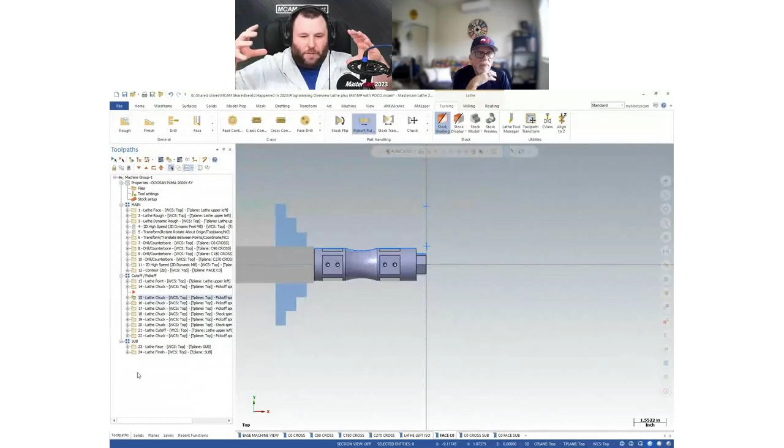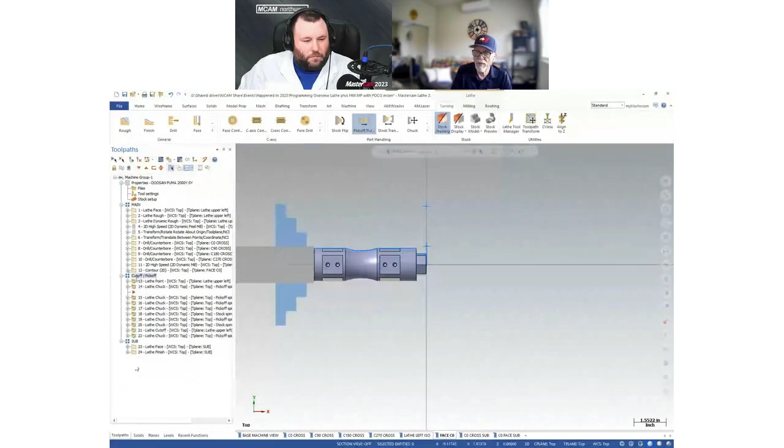And so that's where, Tim, right? We program initially like it's a single stream machine. Then when we're ready to post code, we can move the POCO operation after the sub. You drag the POCO operations down, drop them below the sub, move that there, and then regenerate everything. For Swiss applications, they're all done that way from the very beginning. You do your programming this way, but then you're taking the POCO and making that at the very end.

So when you get training for a Mastercam MP Swiss post, that's one of the first things we do in the training, is to get the users to understand this. In fact, that's what John's working on today, a Swiss install. So this rearranging can be done, and that gives you the ability to synchronize and make things happen at the same time with 2 different turrets.

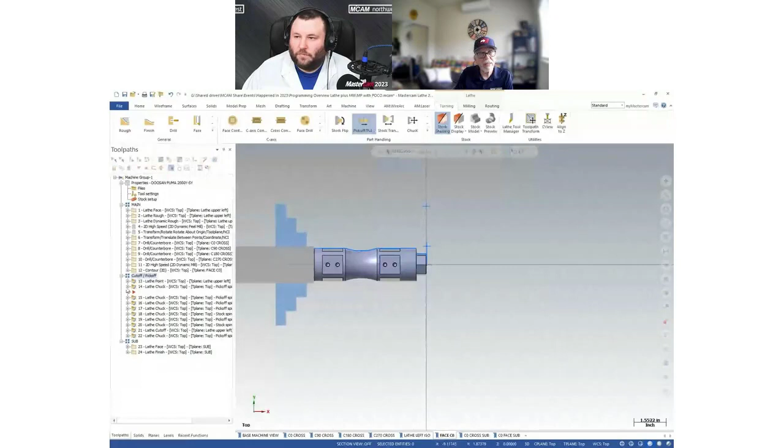So short run, a few parts: run all your main spindle ops, do your POCO, run your sub spindle ops. But when you go into production, that may not be at all what you want happening, right? So that can be rearranged. Any other comments on that? Not for me, but that's because I'm a single stream kind of lathe guy. I don't have much experience with multi-stream lathes, unfortunately.

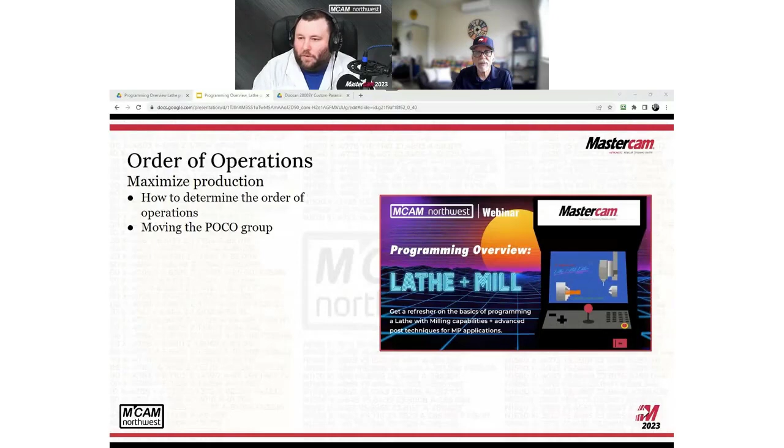Well, it's... ops. Okay, let's go back here. Then I wanted to make a quick mention, if anybody's working in lathe and had been experiencing problems with turn profiles.

That's been fixed in Mastercam 2023 Update 4. It had to do with changes to the Parasolids kernel, the solid modeling kernel. So you now have the ability to do live turn profile right off solid models. That has been fixed. So if you had given up on the turn profile from a solid model, load Update 4 and give it a try, because it's working great.

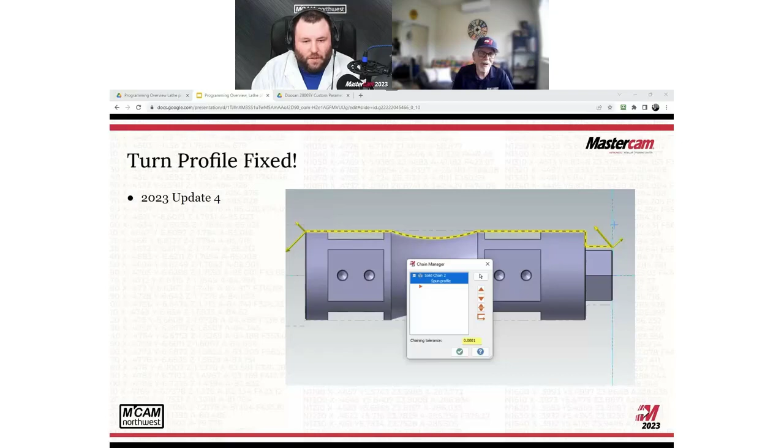Yeah, and some people may have found it was working — I found half the time it did seem to work fine with solid models, and sometimes there were issues, and you'd have to go back to wire profile. Did Update 4 come out this week? Yeah, it was Monday this week that Update 4 came out. So if you have not updated your Mastercam, be sure to do that. That's through the File tab of Mastercam, then on to Help. There's a Check for Update button.

I do want to make an announcement though. Some people who have been early adopters have not been getting their automatic update services working. There was an initial bug with the release of 2023. So if you're still on Update 0, that's what's going on. You need to manually log into my.mastercam.com, go to the downloads page, and get the patch updaters there. That was fixed with Update 1 of Mastercam. So if people downloaded 2023 after, I think, the month of July, they were getting the correct version where automatic updates were working. But those who got Mastercam when it was initially released, between May 31st of last year through about July 7th, you have Update 0, so you need to do that manual update. But we are on Update 4, and it has resolved that solid turn profile issue.